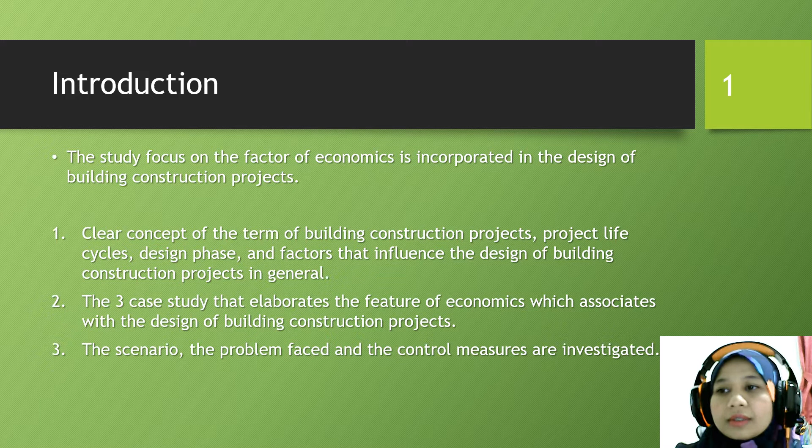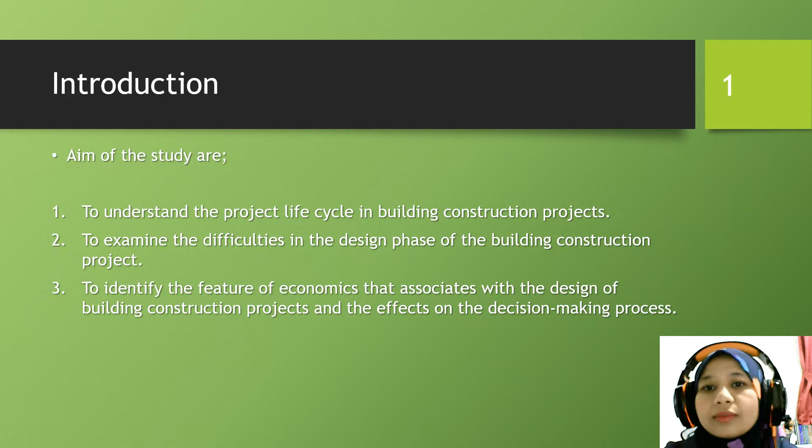At the end of the study, we will understand the project life cycle in building construction projects, and we will identify the difficulties in the design phase of the building construction project as claimed by the designers, for example the architect, the engineers, the quantity surveyor, project managers, and so on. Lastly, we can identify the features of economy associated with the design of building construction projects and the effects on the decision-making process.

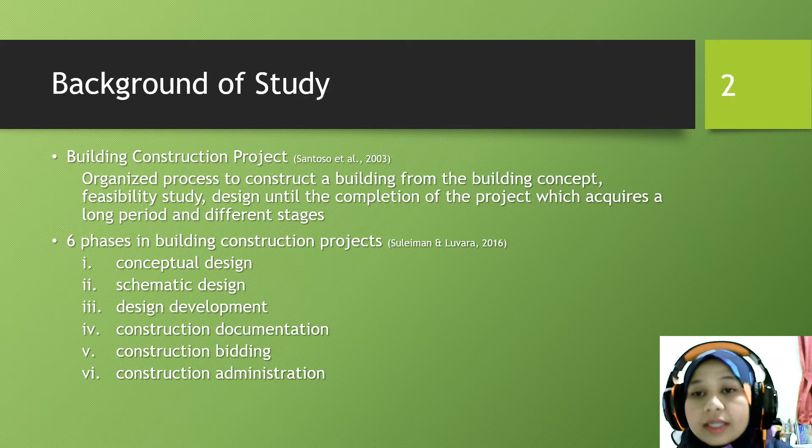The second is background of study. As defined by Santoso et al. 2003, a building construction project is an organized process to construct a building from the building concept, feasibility study, and design until the completion of the project, which requires a long period and different stages. There are 6 stages in the building construction project identified by Suleiman and Luvara in 2016: conceptual design, schematic design, design development, construction documentation, construction bidding, and construction administration. However, it may vary depending on the complexity of the project.

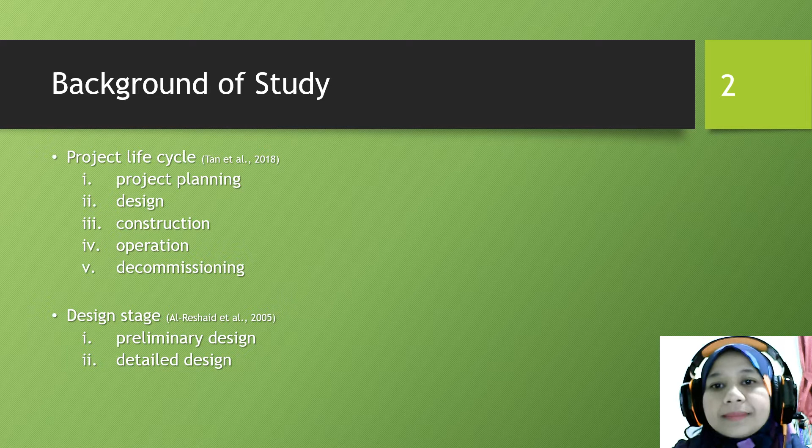However, Tan et al. 2018 defined the project life cycle in building construction projects as having 5 stages: project planning, design, construction, operation, and decommissioning. We zoom in on the design stage because this assignment only focuses on design. There are 2 stages in the design stage: preliminary design and detailed design. The first one, preliminary design, focuses more on the concept and feasibility study of the building project. For example, architectural concept, or building concept, design alternatives, cost, sizing, and capacity of the project.

The second one is detailed design. It focuses more on the process of breaking down, analyzing, and designing the structure in the form of drawings, specifications, and bill of quantities. It involves calculation, analysis, checking, assessment, cost estimation, value engineering, review, auditing, and detailed construction drawings using AutoCAD or Building Information Modeling, BIM. And lastly, approval. Approval might come from the supervisor, the project manager, the project director, or the local authority. The detailed design must take into consideration the maintainability of the buildings and the risks that could be faced during the construction project.

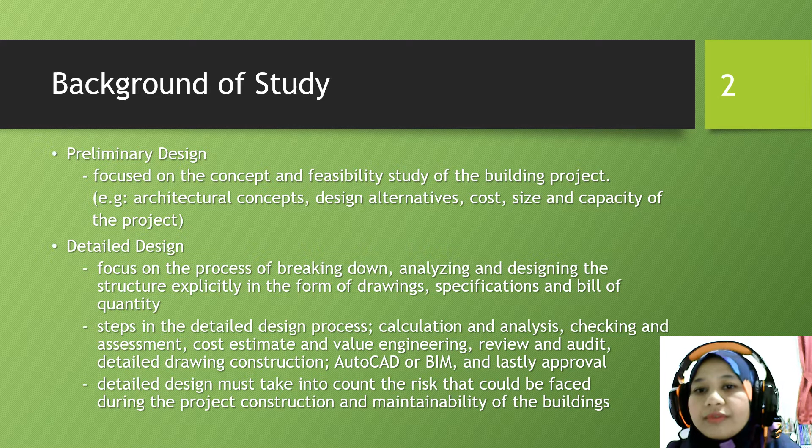There are 2 factors that influence the building design. The first one is internal factors and the second one is external factors. The internal factors might come from the owner, for example, financial problems, unclear design brief, and changes in the scope of work. The second one is from the consultant and the contractor. For example, unrealistic schedule and design period, unclear information in the tender document, lack of consultant or project management knowledge, lack of coordination, and financial problems.

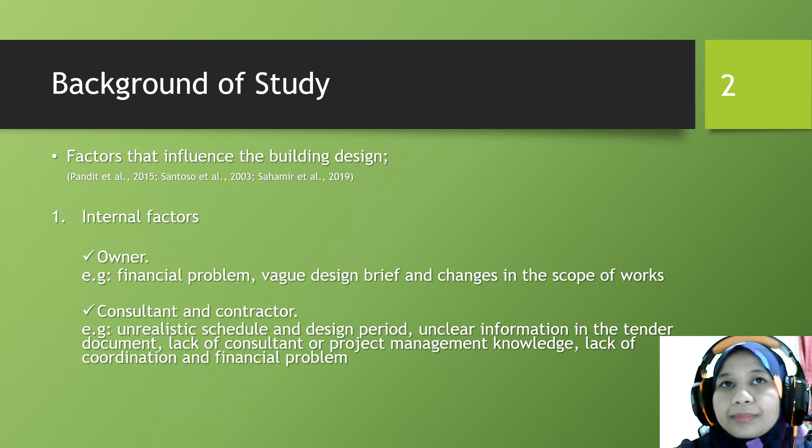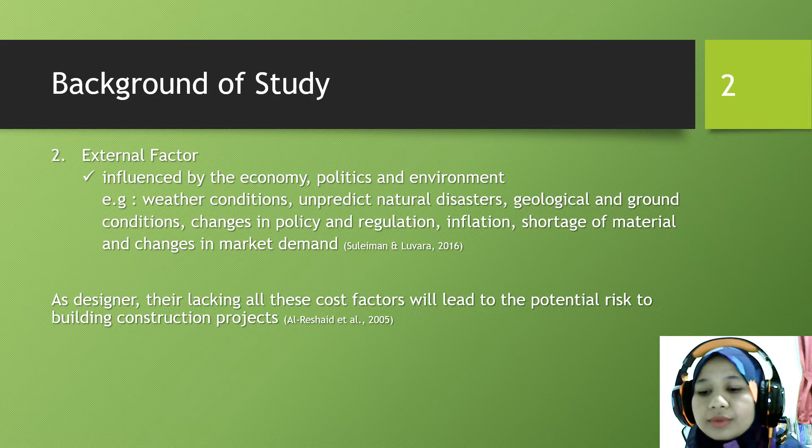The external factors are influenced by economy, politics, and environment. For example, weather conditions, unpredictable natural disasters, ground conditions, geological conditions, changes in policy and regulation, inflation, shortage of material, and changes in market demand. Usually, the external factors are beyond the control of the owner, consultant, or contractor. So as designers, if they fail to overcome all these factors, it might lead to the failure of the project.

Then we take a look at sustainable development in the building construction project. As defined by Hopkins 2016, sustainable development is development which meets the needs of the present without compromising the ability of future generations to meet their own needs. From a building construction perspective, sustainable development can be defined as the development of innovation in green building design. It involves the usage of natural products and green resources in building design.

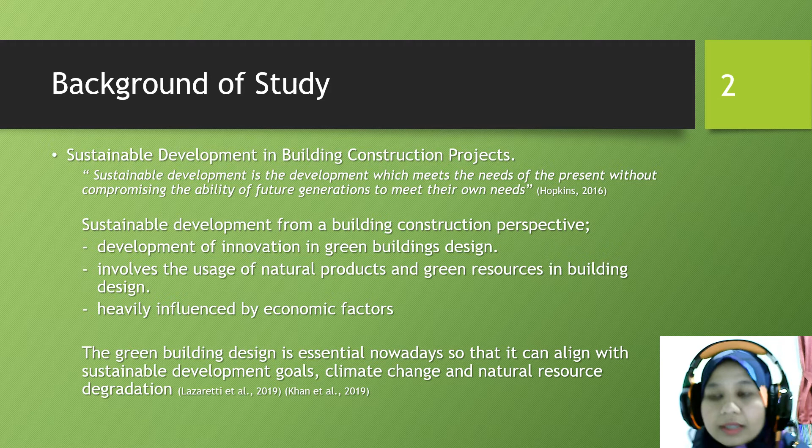And of course, this sustainable development or green building design are influenced by the economic factor. It is important of sustainable development or the green building design because it is a world nation agenda to meet the sustainable development goals or to prevent the climate change and the degradation of the resources.

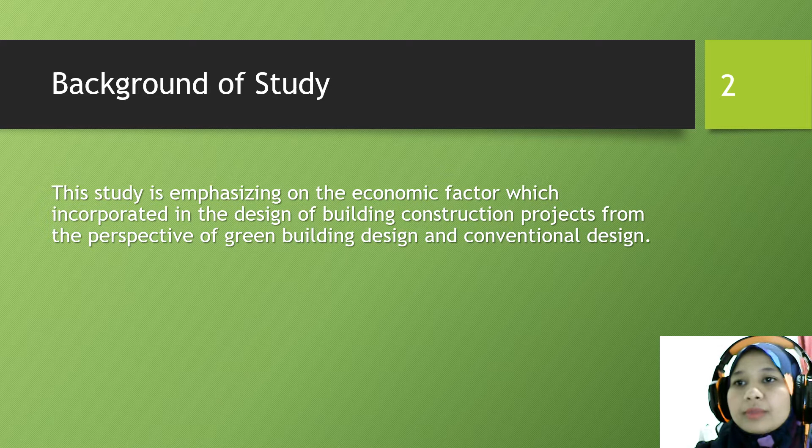So this study is emphasizing on the economic factor which incorporated in the design of building construction project from the perspective of green building design and conventional design. So that's why a long elaboration just now on the building construction project, economic factors, sustainable development, and green building design. The third one is case study.

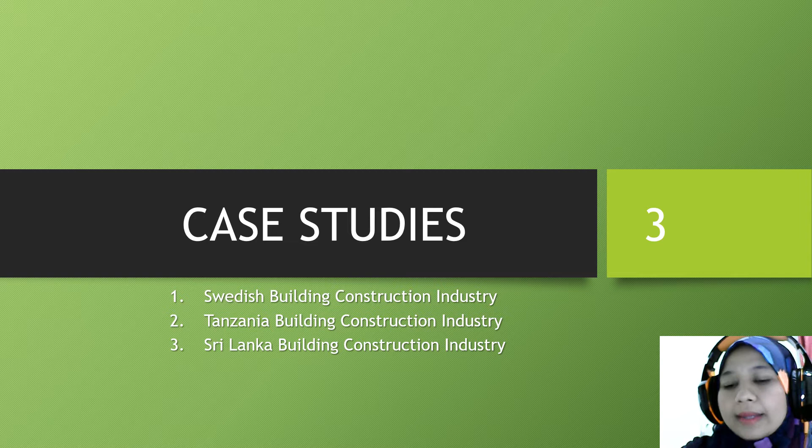We take a look at the case study on building construction industry in Sweden, Tanzania, and Sri Lanka. The first one is Swedish building construction industry study case by Hemström et al. in 2017. The study investigated how the factor of economy is incorporated in the innovative design of green building construction projects in Sweden. So the methodology used are interviews and questionnaires.

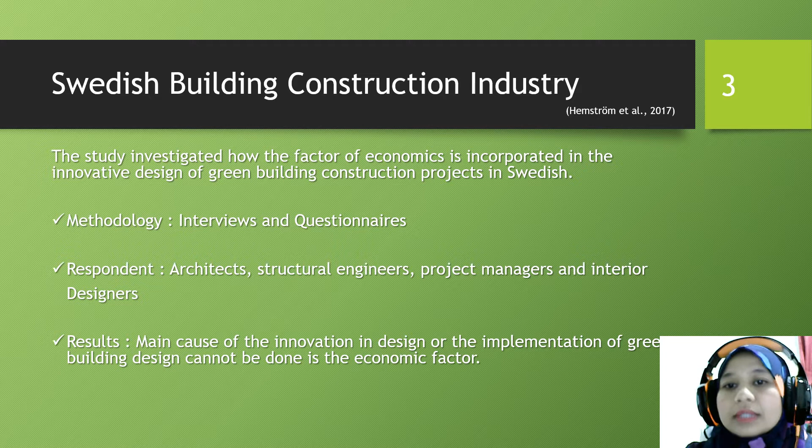The respondents are architects, structural engineers, project managers, and interior designers. So the architect is a major respondent because they are responsible at the early stage of design, building, and the selecting of building material. They also play a role in the construction phase. So the result is the main cause why the innovation in design or the implementation of green building design cannot be done is the economic factor.

So the elements of economic factor identified in this case study are, one, higher capital investment, and the second one is higher initial cost. This is because in the construction industry in Sweden, they are only focusing on initial cost of the project rather than life cycle costs. So because of this higher cost, their local government and building construction players have less interest in implementing sustainable development or green building design.

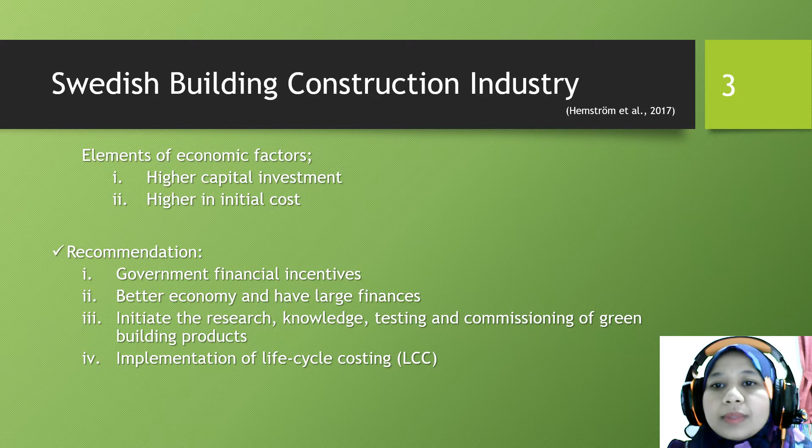Thus, Hemström recommended that the government should have financial incentives, then the government should have a better economy and have more money, large finance, and then the government and the local building industry players initiate the research, knowledge, testing, and commissioning of green building products and implementing life cycle costing.

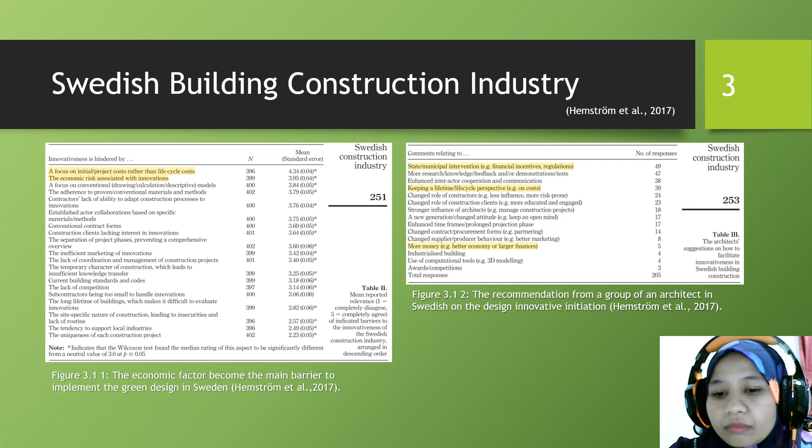The second one is Tanzania building construction industry study case by Suleiman and Luvara in 2016. So the study investigated the factors that lead to the change of design in the building construction phase and the impact of this design. So the methodology used are interviews and questionnaires, and the respondents are architects, structural engineers, and quantity surveyors.

But at the beginning of the study, we identified that the design in the building construction project has 6 stages until the project is executed, and the design stage is involved in the early phase of building construction project implementation. But the design might change in the middle of the project implementation due to several factors. So, this study investigated the factors that lead to the change of design in the building construction phase. Also, it addressed the impact of these changes in Tanzania.

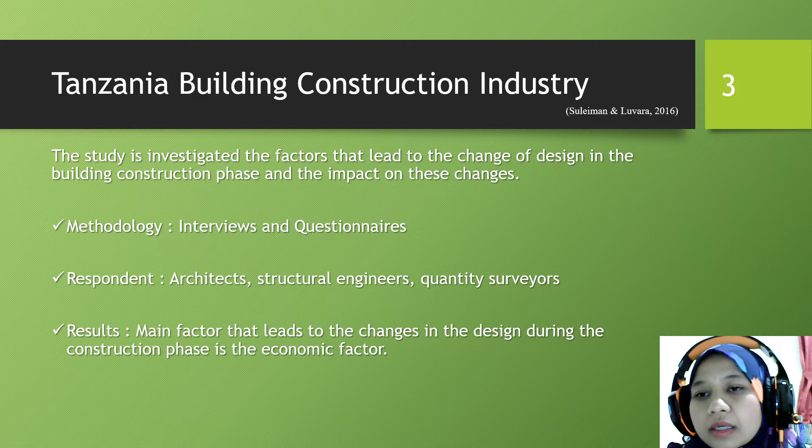So the result shows that the main factor that leads to the changes in the design during the construction phase is the economic factor. So the elements of economic factor that they identified in this case study are shortage of material, inflation, and price fluctuation, which these three are external factors beyond the control of the client, consultant, or the contractors. And the other two elements of economic factor are poor financial management practice and underestimating the cost of the project.

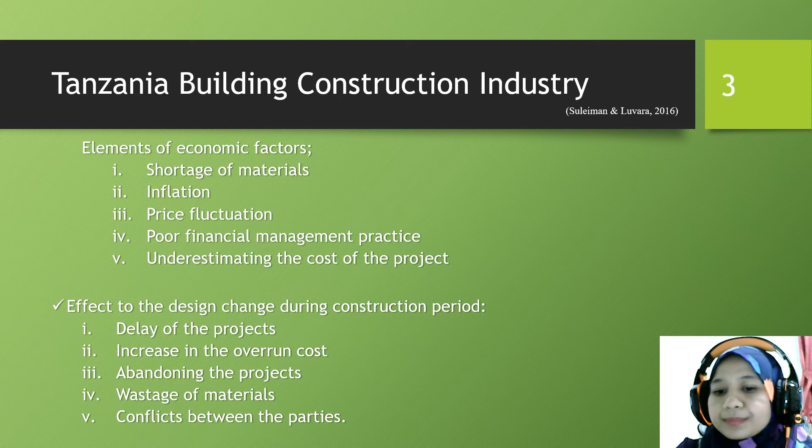Then the effects of the design change during the construction period are delay of the project, increase in cost overrun, abandoning the project, wastage of material, and conflict between the parties, either the owner, the contractor, or the consultant. They may blame each other for this delay of the project. These figures show the rank of economic factors influencing change of design of buildings during the construction stage.

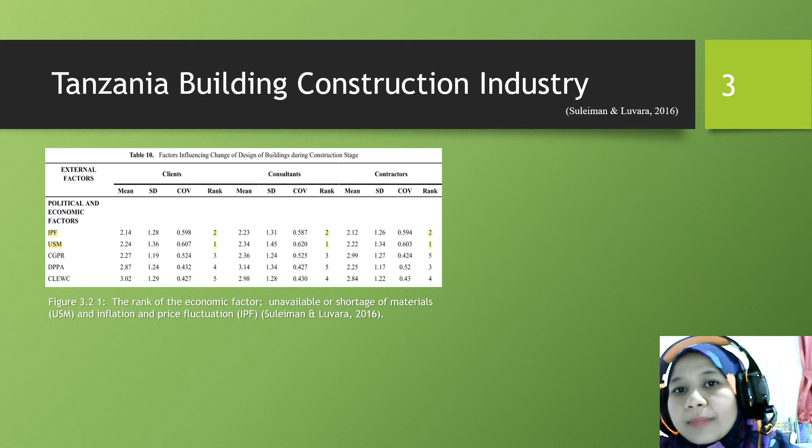The first one is inflation and price fluctuation, and the second one is shortage of materials. So in this study, Luvara and Suleiman recommended a proper feasibility study during the planning stage, full involvement by all parties during the planning and design stage, a clear project brief by the client, enough time for designing the building by the consultant, and sufficient financing either by the owner, consultant, or contractor to run the business, and the involvement of experienced technical

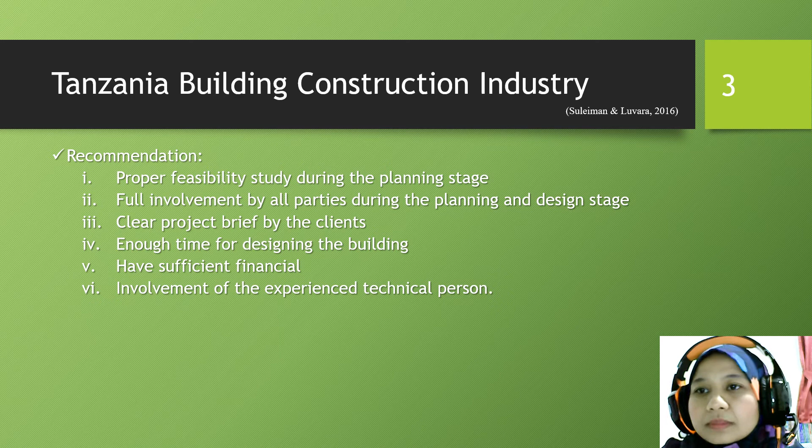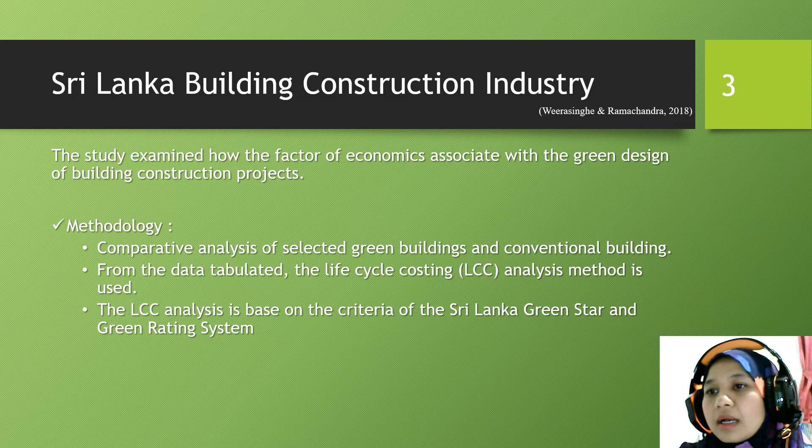persons. The third case study is in the Sri Lanka building construction industry by Weerasinghe and Ramachandra 2018. The study examines how economic factors are associated with the green design of building construction projects. The methodology used is comparative analysis of selected green buildings and conventional buildings, and from the data tabulated, they use life cycle costing analysis, based on the criteria of the Sri Lanka Green Rating and Green Star Rating.

From this study, the result shows that the main economic factor that affects the green design of building construction projects in Sri Lanka is initial cost. By implementing green design in the building construction project, the project cost will increase by 37% compared to conventional building design. The project cost, of course, is influenced by location, climate change, culture, values, time of implementation and size of the building.

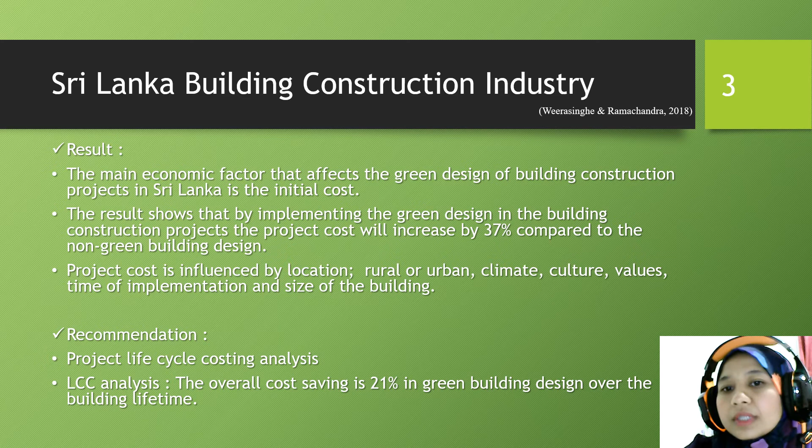The economic factor is important in green building design because it sets the direction of the project, either to construct a green building design or a non-green building design. So in this study, Weerasinghe and Ramachandra recommended that the Sri Lanka construction industry should use project life cycle costing analysis rather than initial cost. They also made a life cycle costing analysis in this case study, identifying cost savings of 21% in green building design over the building lifetime.

Next is discussion and recommendation. From these case studies, the key economic factor in the design of building construction projects is the internal factor, which is higher initial cost, higher capital investment and project cost. The second is the external factor, which is inflation, market price, market demand, and material shortage. External factors are usually related to current political circumstances in a particular country. Another cause identified is lack of financial management practice.

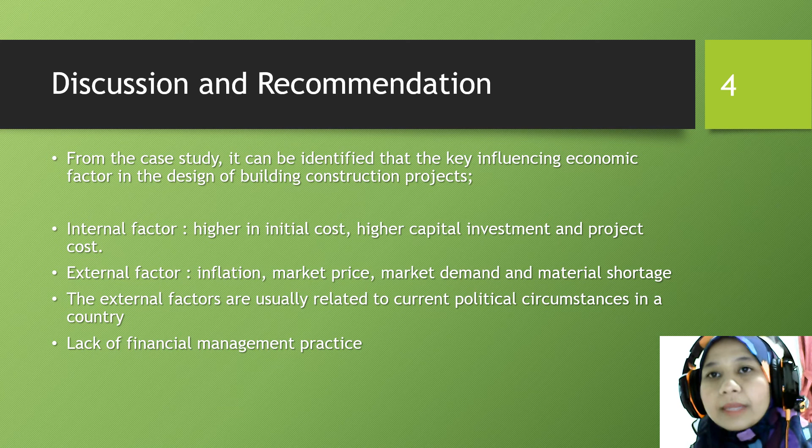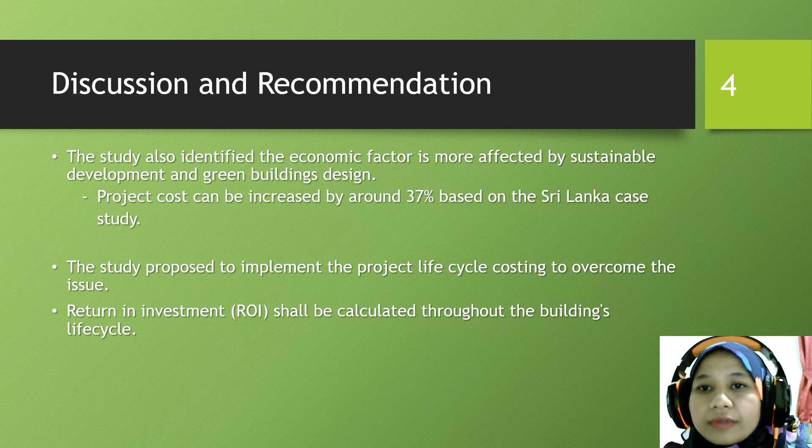The study also identified that the economic factor is more affected by sustainable development and green building design. This is shown by the increase of around 37% in project cost in the Sri Lanka case study. The study proposed the implementation of project life cycle costing to overcome this issue. The return on investment, ROI, shall be calculated through the building life cycle.

They also identified barriers to adopting sustainable development and green building design: government or authority policy, lack of incentives, lack of awareness and understanding among stakeholders and industry players, and no champion in green building design. So they recommended that every stakeholder be part of the collaboration and give incentives to reduce this barrier. This is because green building design also involves comfort, durability, and economical building, and is important to address current and future environmental concerns.

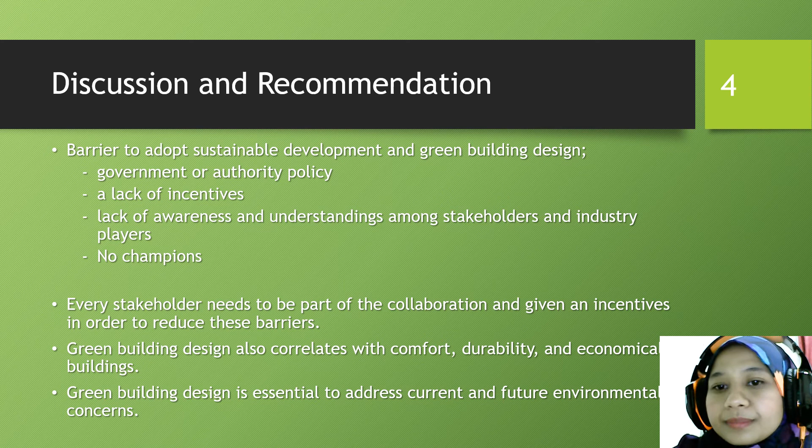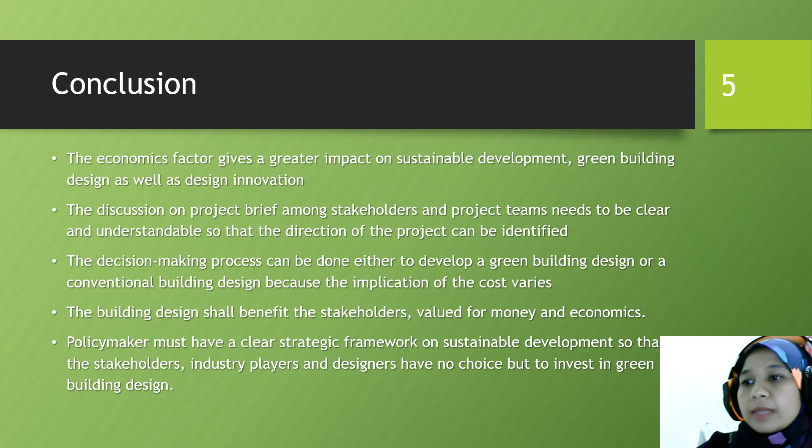The building design shall benefit the stakeholders, value for money, and economics. Policymakers must have a clear strategic framework on sustainable development so that the stakeholders, industry players, and designers have no choice but to invest in green building design.